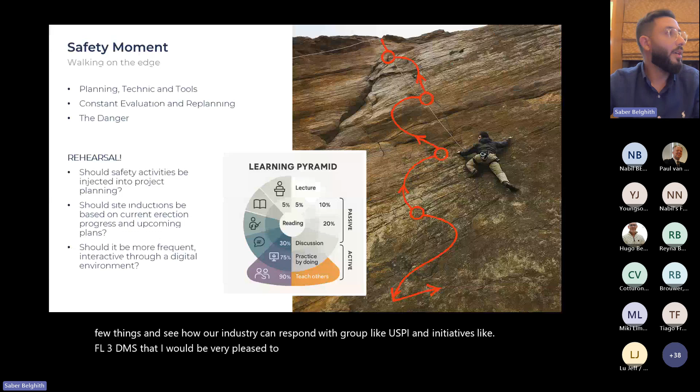So a bit of safety, walking on the edge. This is how I titled this slide. It's not just a safety metaphor, it's a project reality. You've got planning, you've got known processes, common legacy tools, it's all made up of the best team for the project, and yet you're always one misstep away from delay, injury, and worse.

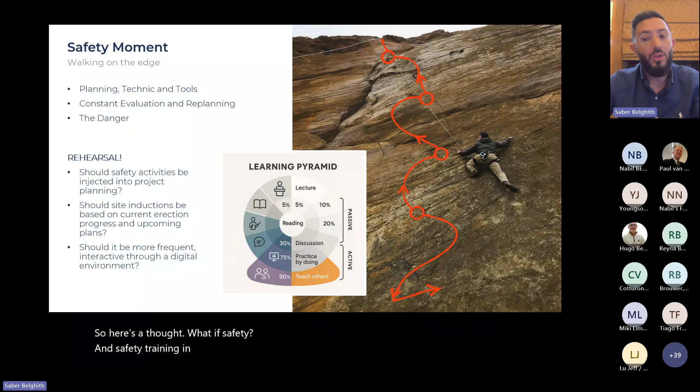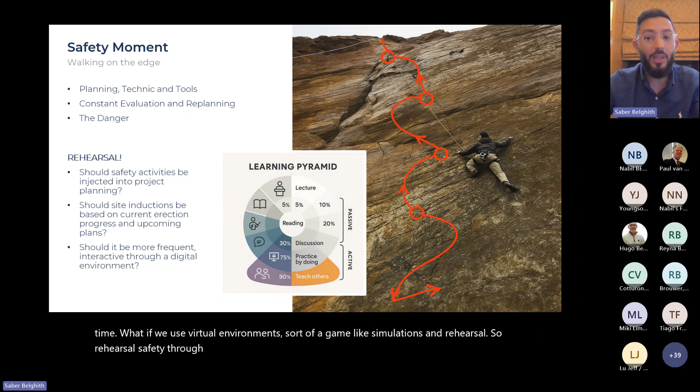So here's a thought: what if safety and safety training and occurrence could be adapted to construction progress, very real time? What if we use virtual environments, sort of game-like simulations, and rehearsal - rehearsal safety through the actual construction real-time progress? So it's not just to train, but it's to plan, right?

And I put this learning pyramid - well, I actually made it as a circle chart - and practicing by doing is seen as 75% retention, active retention of training of anything. So training of safety could be one of the actors for this.

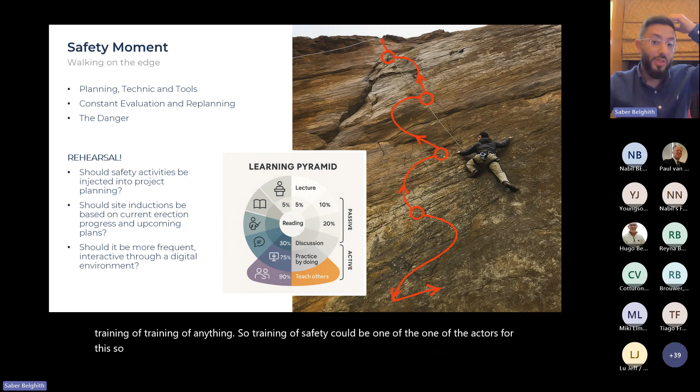Because really the truth is that safety is not just check boxes like BBS programs, behavior-based safety programs, or just safety records and forms that we have to fill in on site. It's more than that - it's how could we have a system of anticipation?

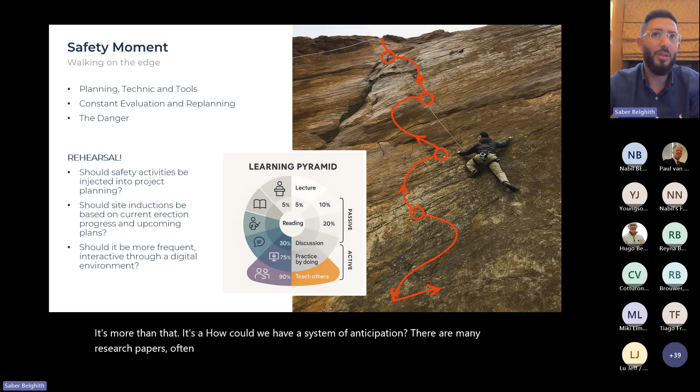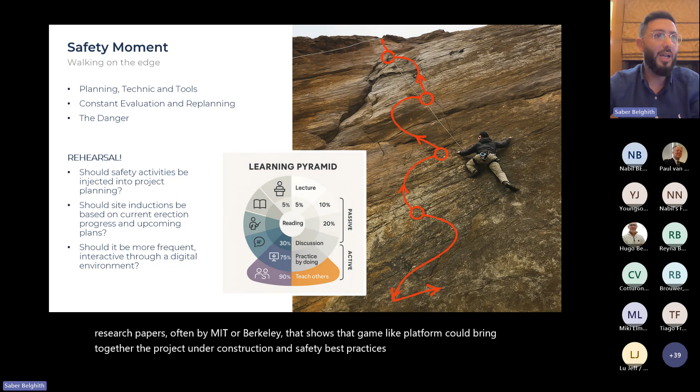There are many research papers, often by MIT or Berkeley, that show that a game-like platform could bring together the project under construction and safety best practices, with lessons learned and all the feedback and scenarios, and it could be built into the gameplay, and all the engineers, the foremen, the scaffolding engineers, whoever, can join in and practice by doing.

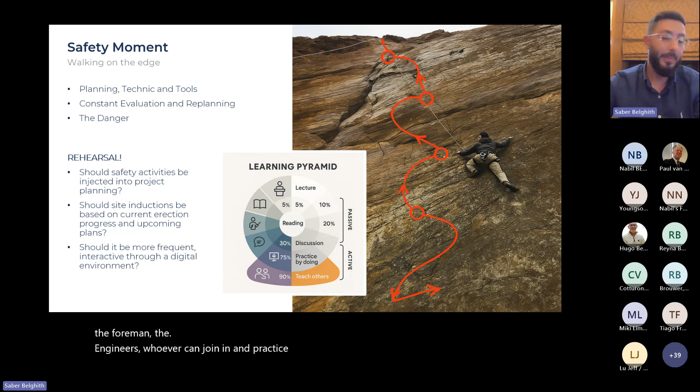We've got to look at the big picture. I think it's always nice to take a macro view and then deep dive, see where I'm coming from and where I want to go.

There is a very big global energy demand. I don't have the exact values, but they are increasingly important. The growth rate over years is increasing itself. It's not a linear growth, it's an exponential growth, and we're really witnessing unprecedented demand for energy.

Infrastructure is expanding. We've seen mega projects in Saudi Arabia, global transportation systems, data centers, AI data centers needing even bigger demand, and regular cloud and digital services. So this all needs energy, and since energy production isn't free, it has consequences.

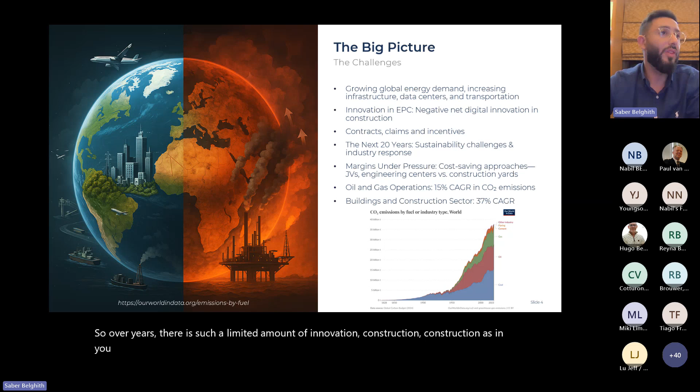Over the years, there's such a limited amount of innovation in construction — in yard, fabrication, erection work. We fall behind year after year. Other industries have leaped forward with automation, AI, integrated data.

Construction remains completely fragmented. Tool adoption doesn't always lead to improved outcomes — we're adding tools, but not always value. This lack of digital maturity has ripple effects: it implies contracts and claims battles, it slows decision-making, it weakens alignments. With every partner working from different tools and different truths, even small delays or misalignments become costly disruptors.

Looking ahead over the next 20 years, I've seen from one of the studies that we expect 60 to 90 new FPSOs to be built. With 90 FPSOs to be built, we are going to respond to the demand for energy. But with the net innovation of our current industry, we are not going to make it better — it's just going to get worse, and projects are getting bigger.

If you've seen Yellowtail, the One Guyana project is a mastodon of an FPSO, about 300 meters — so these are mega projects.

I've seen companies — we all operate as companies, let's be real. Companies have P&Ls, have shareholders, have investors, and we have financial pressures. The margins are thinner and thinner, and everyone is looking at cost-saving approaches.

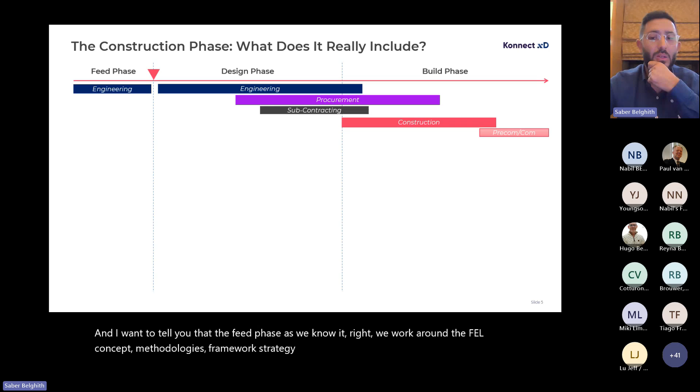I want to tell you that the FEED phase, as we know it, we work around the FEL concept — methodologies, strategy framework, front-end loading — and our FEED and design phases build the constraints, build the quantities, build the strategies. Yet we do not see a lot of construction initiatives within these efforts.

In my past, I worked for Technip. I was part of an amazing group called the Construction Method Center — a corporate group reinventing and pulling the lessons learned from hundreds of projects, years of feedback. We developed so much more construction engineering and helped out with project execution plans. It was an amazing time that really built onto what I know today, what I've done, and how I've built KonnectXD.

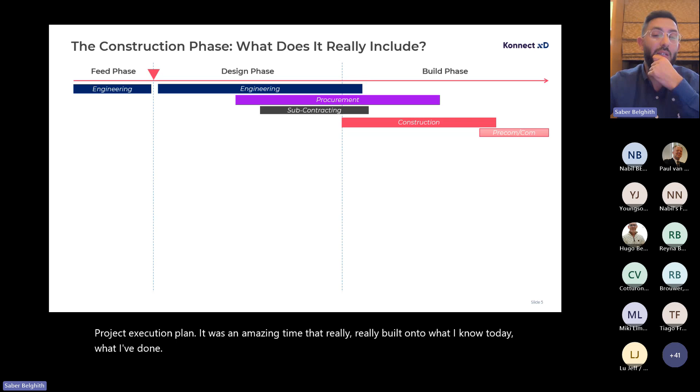So with construction department being more involved in FEED phases, early on in design phases through preliminary construction studies, could be heavy lifting, could be scaffolding studies, constructability programs, reviewing construction schedule. We speak about construction schedule in a bit, and helping make sure construction man hours are adequate, to not say accurate, adequate.

It is a real problem because we estimate the project based on outdated indices. The index, the Excel files, the historical data is either outdated or poorly managed in Excel. And we build this preliminary plan that actually becomes the plan. These become schedules and cost estimate, and we assume that it's going to be a clean handover between FEED and EPC detail or EPC execution.

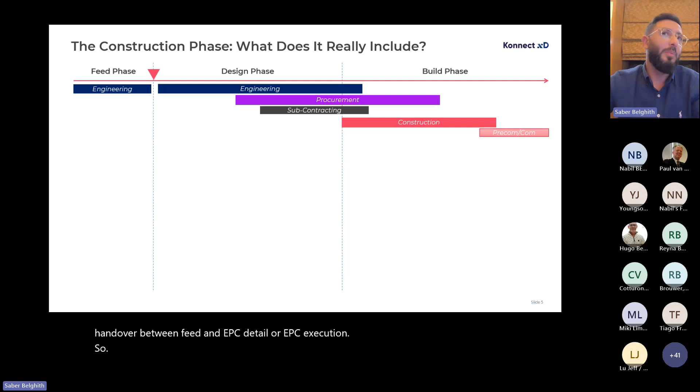A bit about softwares, not mine, others, the engineering one. I know we may have some Aviva guys in here. Aviva is great, I have no problem with Aviva, actually.

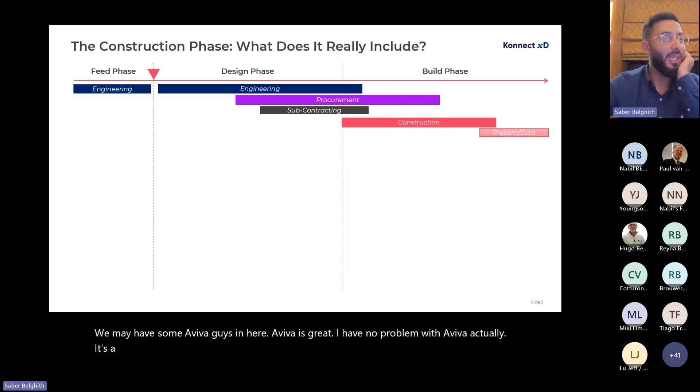It's a constraint. Coming back to P&L and companies, you're looking at being lean. You have a bunch of smart people in these companies, and they try their best to standardize, to lean produce whatever they have to do. Although it's in silo, in core softwares, it's a common group effort, a people effort to put together a project.

But here's the catch: owners and operators. So back to you guys. You have requirements, and it's all understandable too. You do have a decision to make for all your assets. You've got to be an Aviva-owned kind of system for your digital continuity, for your standardization of operation, and you've got to be either choosing Aviva or Hexagon Smart Plant suite of product. So you've got to make a choice. I don't think I've come across client owners that are using both.

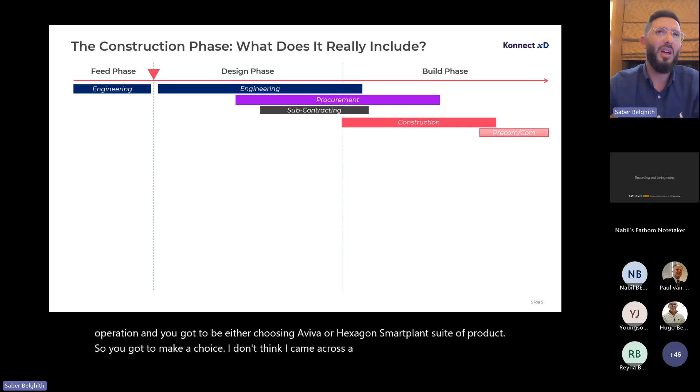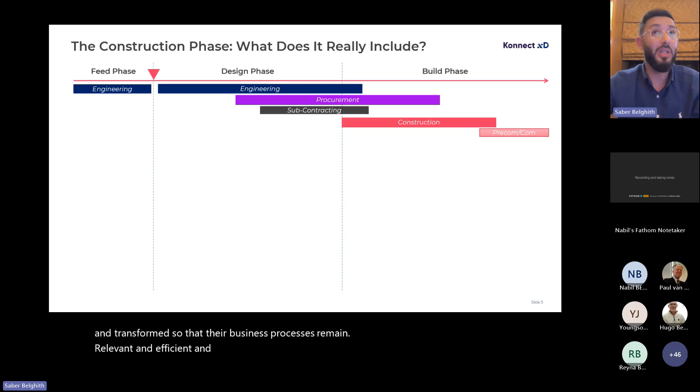It could be legacy one, and then they have taken the decision to only use one. But down the line, EPCs must use both and administrate both and build all their processes either upon each, or converted and transformed so that their business processes remain relevant and efficient, flexible enough to improve it, because it's never good on the first batch, isn't it?

Needless to say, it's not clear, and there's a lot of noise at the beginning of the project at the red triangle. So I have a tentative slide of how it's really being done.

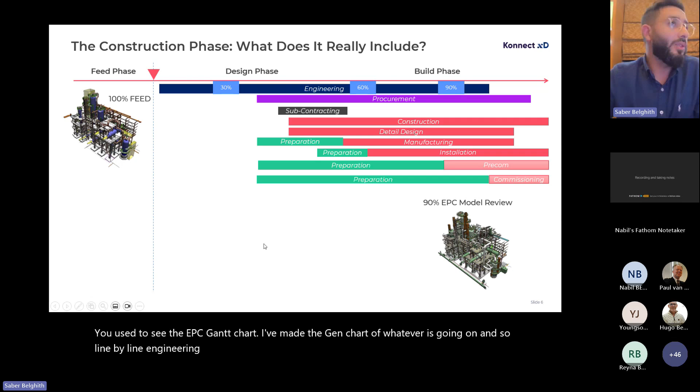You used to see the EPC Gantt chart. I've made the Gantt chart of whatever is going on. And so line by line, engineering has increased by a lot, and it's not a joke.

I wish I had done this by man hours. Looking at the bars like this doesn't show the amount of man hours spent in construction is a lot more, just that the thin bar is a lot. So I had to split it into what it is actually.

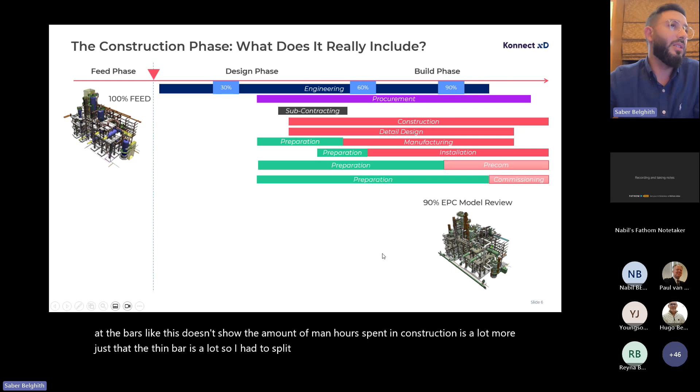So the issue is engineering goes on for a long time. Procurement starts pretty much when long lead items very early, and then it happens for a long time until we actually get 90% right. And I can tell you, we have quantities of engineering revision after it's IFC, and it's not looking too good after 90% either. So we have a sort of a broken model, and that's probably my next slides.

But I really want you guys to focus on this part. Construction is just not construction. Construction is in charge of detail design.

Construction actually takes the 3D model of engineering and makes it into a fabricatable, an erectable, a construction grade 3D model with actual steel structure, actual welds and spools, and things get fabricatable. Although they wish they could have more information earlier, they're unable to plan production of their fabrication.

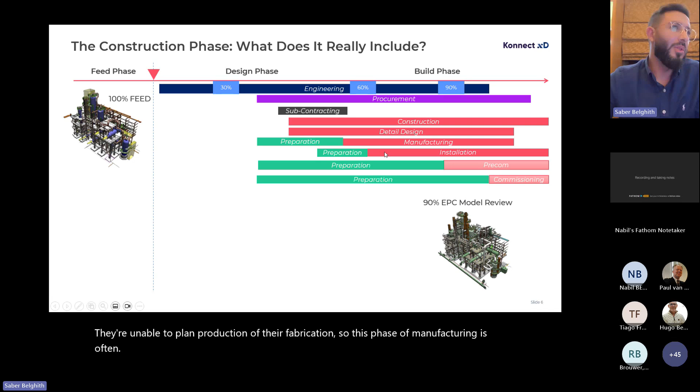So this phase of manufacturing is often underestimated, I would say. It's an important link between procurement, detail, and installation. It is a very important workstation, and I'll speak about workstation a bit later.

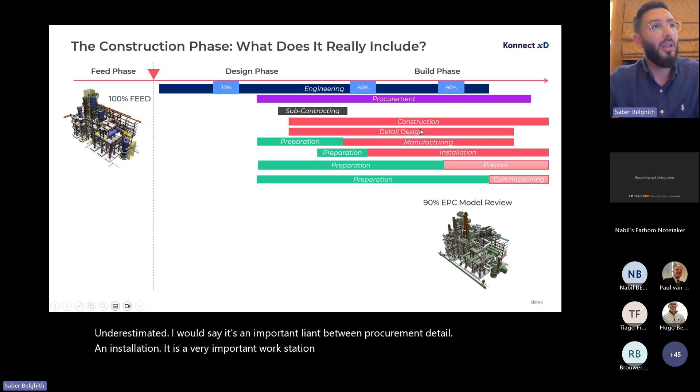I have to be mindful of the time. I'll spend the whole day talking to you guys. So 20 minutes, I have about 25 more minutes to go. I think I'm going to accelerate a bit.

So what I've seen is that construction is a great mindset. Construction would do things that is not necessarily on paper, but they want to get ready. They want to make sure they have planned enough resources. They have understood the scope of work so that they can use a maximum of their fab shop and painting shop and scaffolding.

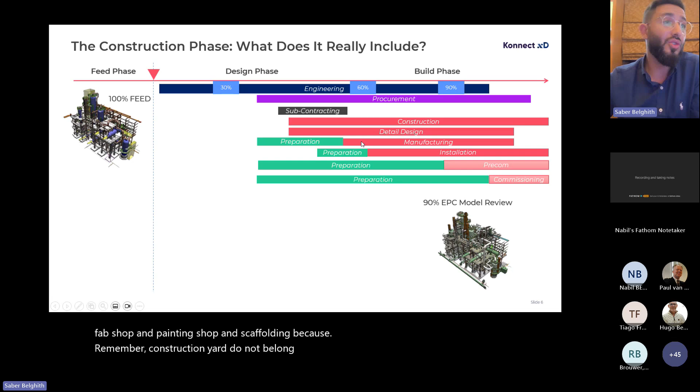Because remember, construction yard do not belong to EPCs. Construction yard do not belong to owners and operators.

Construction yards can do 2, 3, 4 clients at a time. Therefore, they have a workstation and a manufacturing issue of delivering to certain projects. So we'll speak more about them later. And manufacturing will deliver to installation.

And I love to split construction into pre-commissioning and commissioning, and really pointing out that these guys do not just show up here. I mean, these bars are counterintuitive. They don't start working here. They actually want to work a lot earlier. They need P&IDs. They need to prepare loop checks. They need to prepare understanding of their systems. They need to do a lot of work.

where we develop 3D models, by the way. It is more common, I hope. And I don't think it's going to go slower. It's just going to be more and more automated and better information, therefore better estimates, maybe better schedules, better understanding of the scope of work. And this is a 90% EPC model review. That's why I put it right here. And I have the next slide to explain a bit about it.

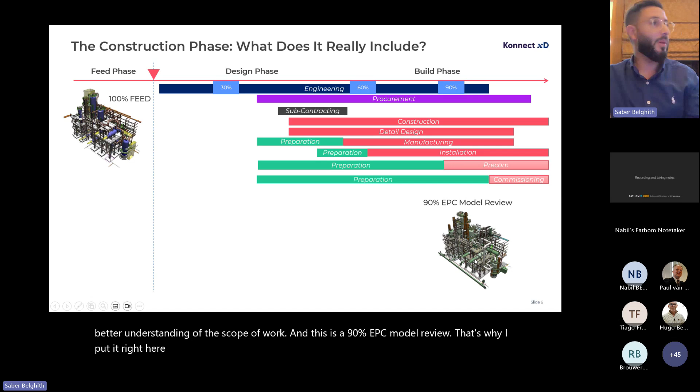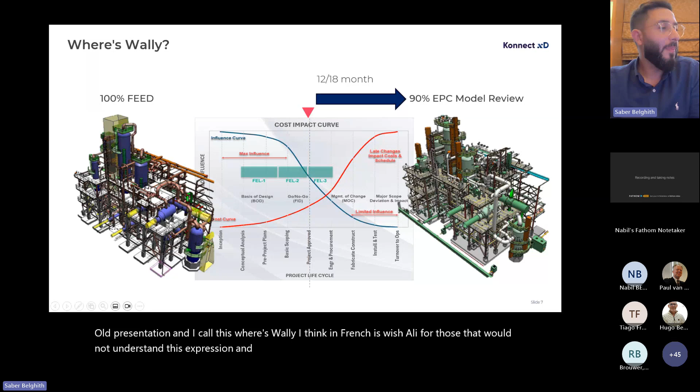So I put together a 100% FEED and a 90% model review. These pictures are 10 years old. I took them from an old presentation. And I call this Where's Wally? I think in French it's Où est Charlie? For those that would not understand this expression. And I had the data back in the day, but I mean, look at it. This is 100% FEED. This is 90% EPC model review, although this was 18 months later.

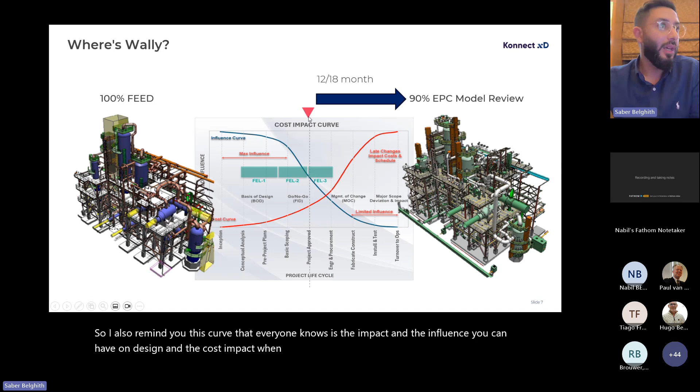And if I come back to this, I remind you that construction wants to know as much as they can, although they can't get any information, or not much, unless there's a certain maturity of the engineering. So I also remind you of this curve that everyone knows: the impact and the influence you can have on design and the cost impact when changing stuff. And so I put that red triangle and that line to show that this is the award of the EPC project. Therefore, FEL3 starts here, and then anything you do has a really wide impact.

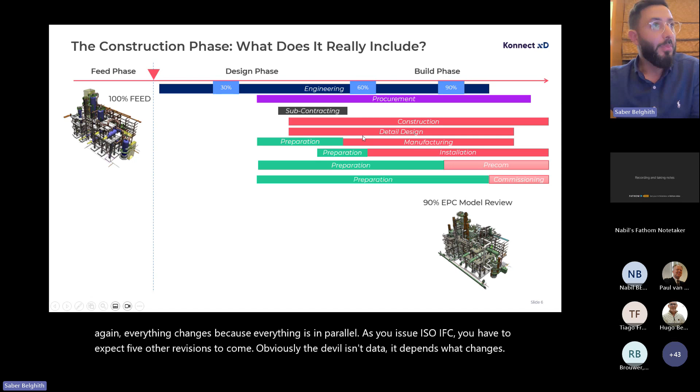And again, everything changes because everything is in parallel. As you issue ISO, IFC, you have to expect 5 other revisions to come. Obviously, the devil is in the detail. It depends what changes. But because it's an analog process, we've got to look at it from a different angle.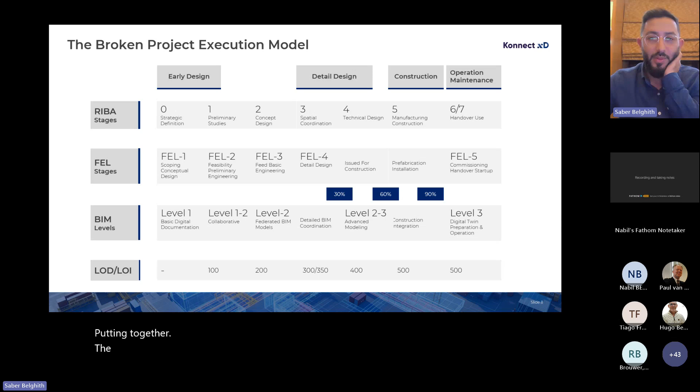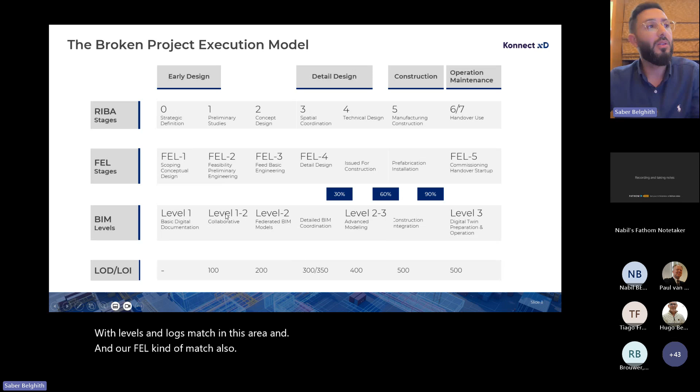So I also put down this slide that is about putting together the FEL stages that we know with the BIM stages that we probably not all know in here. It's building information modeling, a lot of you may know, the BIM with their modeling levels. So they have different ways of talking about it. They have RIBA stages, but they all kind of match. And BIM levels and LODs match in this area. And our FEL kind of matches also, with a little bit of overlap and differences in some places.

But I want to highlight this area. The area of concern right now, the EPC phase, where we have a 30%, 60%, 90% model review. And when things are issued for construction about here, for us, they already have an advanced modeling that is probably a 90% LOD 400. This is fabricatable. This is installable level of development.

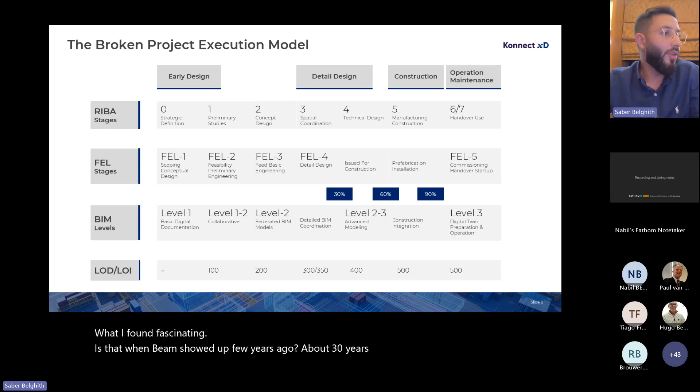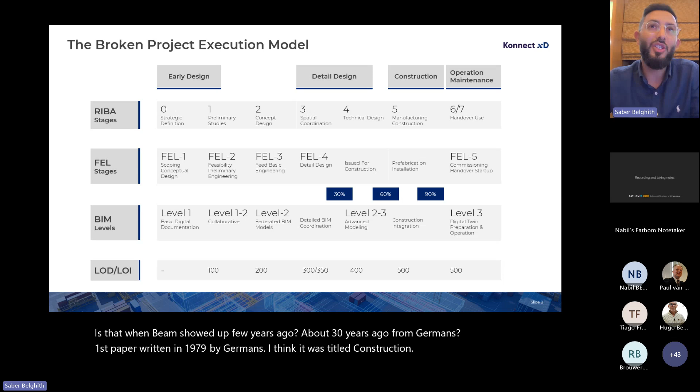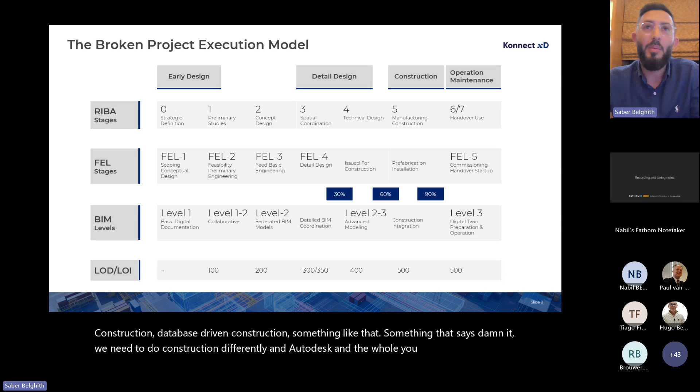What I found fascinating is that BIM showed up about 30 years ago, from Germans, a first paper written in 1979. I think it was titled Database-Driven Construction, something like that. Something that says, damn it, we need to do construction differently. And Autodesk and the mega companies were able to leverage this research paper and develop software and processes with industry standards. There are other groups like buildingSMART, and other groups that are a bit more advanced than us. It's a bit different, but what's quite interesting is that

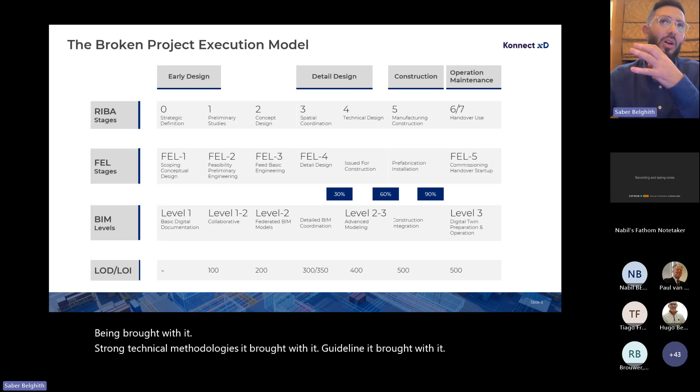BIM brought with it strong technical methodologies. It brought with it guidelines. It brought with it the need for product catalog libraries in the 3D software, and a whole framework, obviously, of working between disciplines. And you see VDC, virtual design and construction groups, in the middle. That is an augmentation of planning.

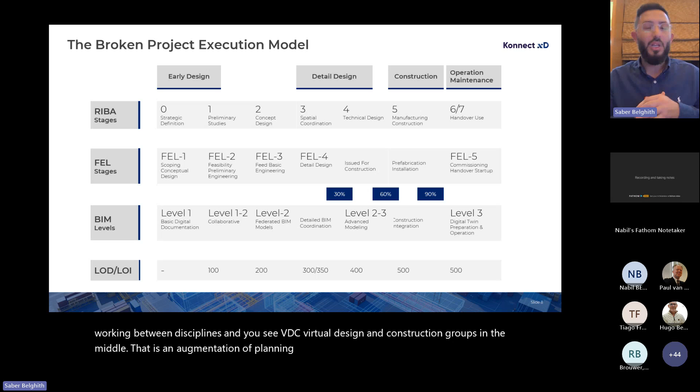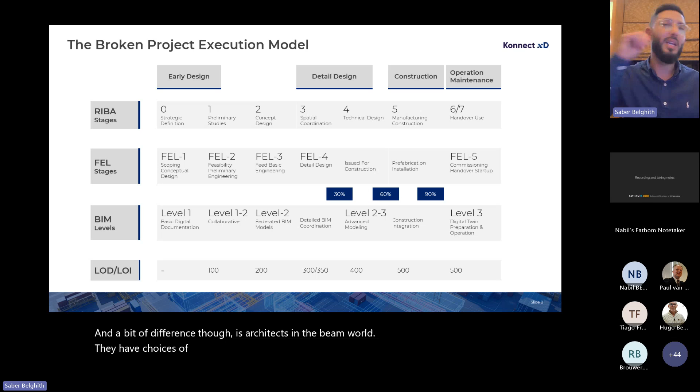And similarly, we have AWP groups from frameworks, and a bit of difference though is architects in the BIM world. They have choices of creativity. They can design things that are out of the box. In our industry, we rely on process engineering, strong methodologies, material classes, piping class, libraries, product libraries, and so on and so forth, catalogs that really help fundamentally the capabilities for shareable data and unified data.

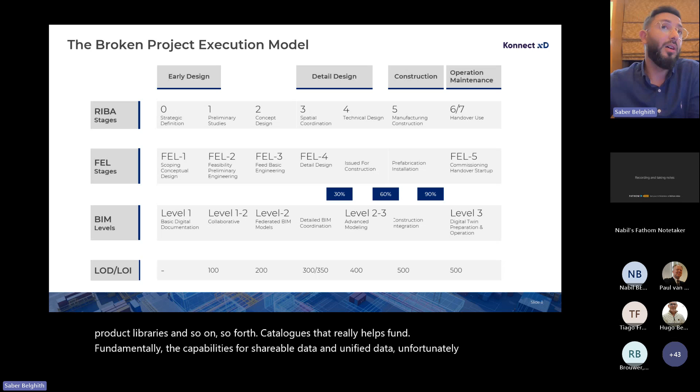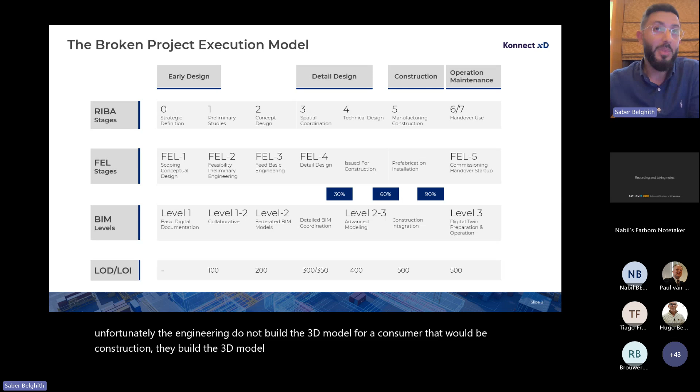Unfortunately, engineering does not build the 3D model for a consumer that would be construction. They build the 3D model for themselves. And most recently, thanks to CFIHOS and some other initiatives required by owners and operators, making it an asset that they can actually use for operation and maintenance.

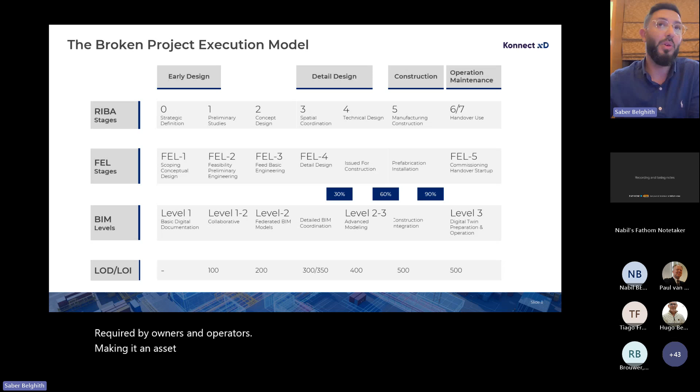And here's another problem that we encounter in 2025. I came across a real owner-operator request in a tender, and they're asking for an enterprise information management tool. This is a big box. I love how it doesn't have a name, really. It doesn't have an image compared to everything else. It is something that no one knows what it looks like, what it is. It looks like something that serves as a single source of truth.

It looks like it serves as control over the data, the things that are going to change, automation with this icon, the automatic icon. It looks like it's a guarantee for quality or better quality, and the availability of this data, being able to have a repository where data can be consulted. But it really is to show that although there's a lot of problems with this from a software architecture point of view, it is a good effort.

It is clearly not something nice to have anymore. This is expected, so owners are really pushing for it. EPCs are adapting. EPCs are using a new set of tools. They are amazing tools, like Aveva Engineering and some other tools that could respond to some of these aspects. Yeah, it is the real truth.

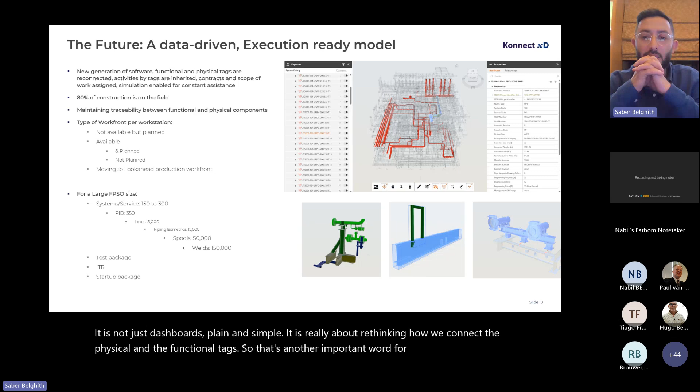It is really about rethinking how we connect the physical and the functional tags. So that's another important word for us. Tags, where we could assign work to tags. We could track the changes on tags. We could move towards real production readiness. So if you think of an FPSO, a bit of sizing of what we're talking about. With KonnectXD, we've done about 7 or 8 FPSOs, not small ones, big boys.

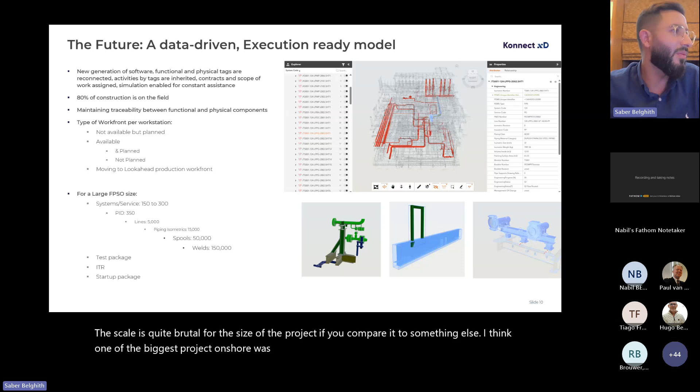And those have 150 systems, up to 300 sometimes, 5,000 lines, kilometers of lines, obviously, 15,000 isometrics, 50,000 spools, 150,000 welds. It's kind of big numbers, but still something that is manageable. It's not called big data. The scale is quite brutal for the size of the project if you compare it to something else. I think one of the biggest projects onshore was about 20,000 something isometrics back in the day.

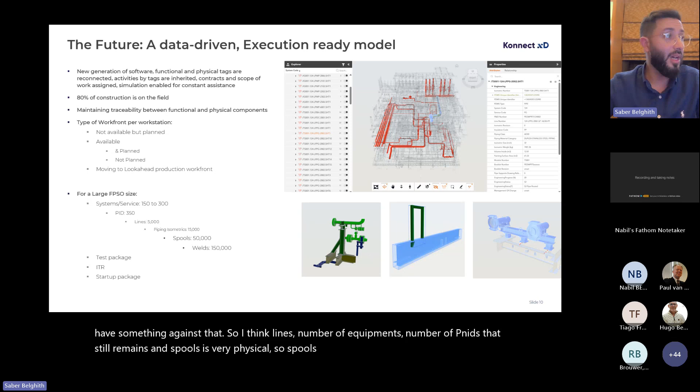But that information is actually unreliable, in fact, because the piping isometric is a byproduct for exporting drawings, and I have something against that. So I think lines, number of equipment, number of P&IDs, that still remains, and spools are very physical. So spools are the little pieces that we have to put together. They go from 2 kilos to 2,000 kilos.

And it's very important to see that it is very easy to kind of lose control, and lose control fast, especially when you are a slave to engineering and procurement groups. Not in a negative manner, in fact, but you're waiting. And as you're waiting, you are unable to scope out, hire people, keep people.

And so, okay. So now let's imagine if every activity could be tracked by tag, if change could be captured in real time. So changes from the engineering, changes happening on the construction site. And if we could clearly identify work fronts. So I like to categorize work fronts into 3 main categories. Work front that's not available, but is planned. Work front that is available and planned. That's like a winner. And available work front, but that's not planned. And we've got to think about what we are going to do with it.

Is it going to stay in laydown and perish, or is it going to be squeezed into assembly line and fabrication line and installation? So it's all about moving to a look-ahead production work front, and this is about understanding the time and duration that every single tag across every single activity will last, so that we can plan out weeks and months in advance.

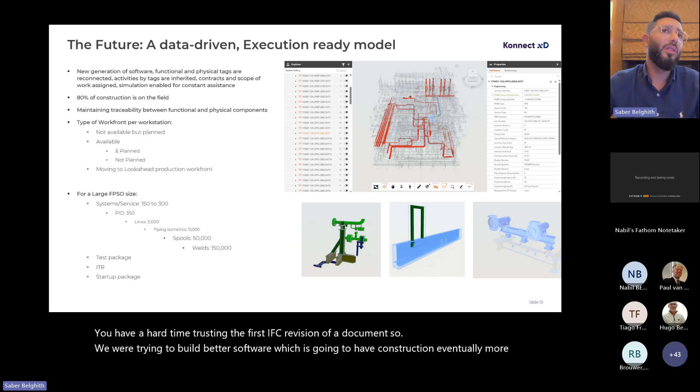So we're trying to build better software, which is going to help construction, eventually more people, but through a workstation mindset. So I've got to jump to technology, but actually I want to show you a bit of what's written right there on the right, on the diagrams, on the pictures. Let's start at the top.

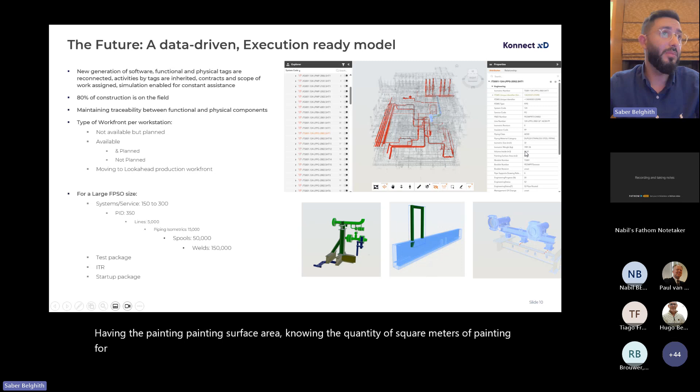Reconnecting what the systems are, what the ISOs are, what the spools are, and having curated data is not a nice-to-have anymore. Having the painting surface area, knowing the quantity of square meters of painting for isometrics, or the volume in cubic meters for later testing and cleaning, the total weight and all this data curated. The name of the game is also quality.

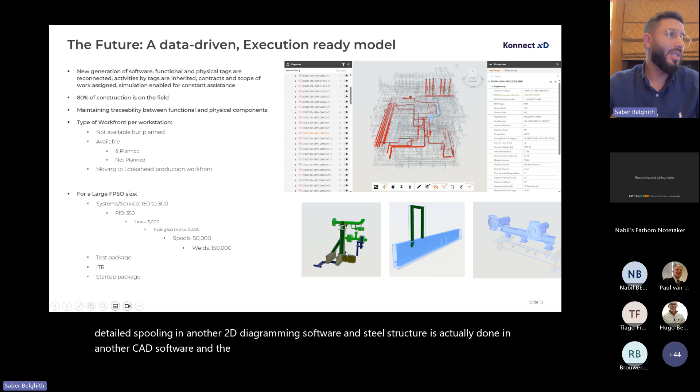This picture is a representation of the physical world and the functional world not being able to connect with our current tools. Our tools give us piping within CAD software and detailed spooling in another 2D diagramming software, and steel structure is actually done in another CAD software, and the reconciliation of steel structure supporting piping is not done at all in our original source CAD software because it's too heavy, it's too complicated.

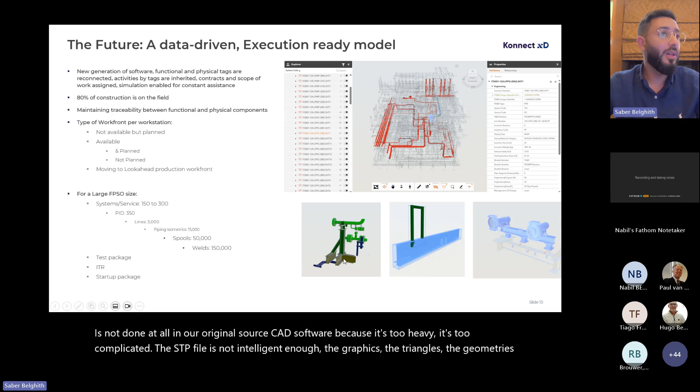The STP file is not intelligent enough. The graphics, the triangles, the geometries, the B-reps of the steel structure are not getting imported properly into CAD software without giving names. And so this is where KonnectXD comes into the picture. In this picture, KonnectXD has connected this pipe with this ancillary pipe support, with this steel structure pipe support, with this steel structure beam.

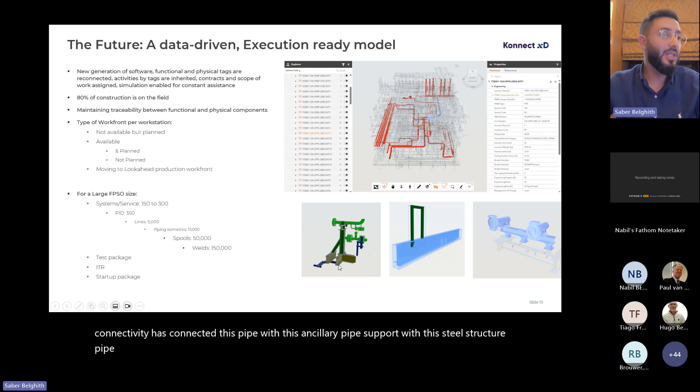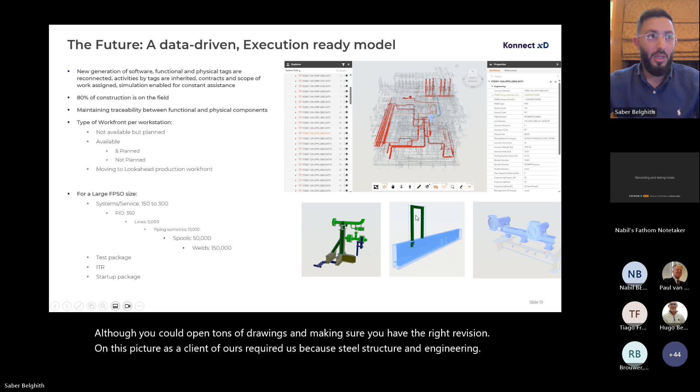And today, if you were looking at how we process data without KonnectXD, you would not have this information at all, although you could open tons of drawings and make sure you have the right revision. In this picture, a client of ours required us, because steel structure and the engineering CAD model are disconnected without KonnectXD, to find discrepancies. Some people would think of clash management for this, clash checking, clash detective, whatever the name.

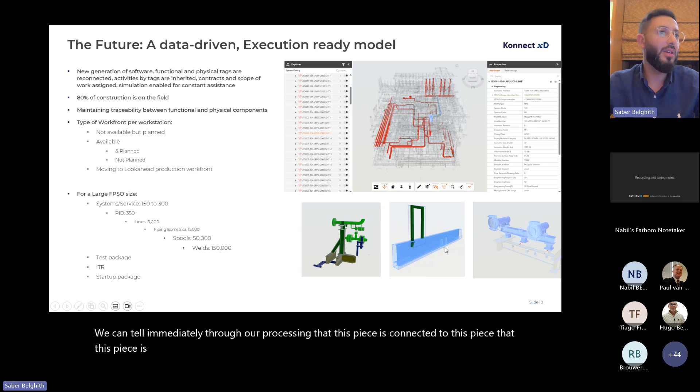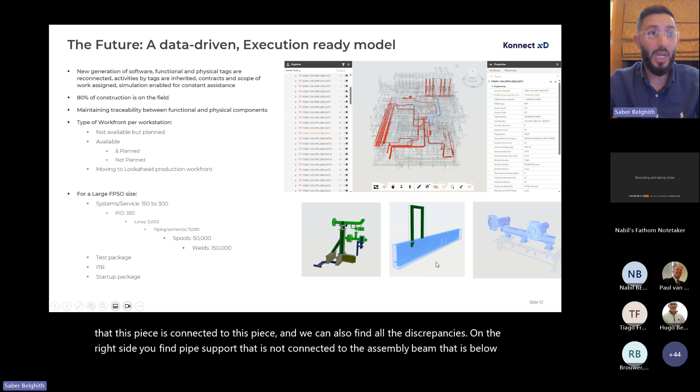We've invented physical relationship checking. We can tell immediately through our processing that this piece is connected to this piece, and that this piece is connected to this piece. And we can also find all the discrepancies: on the right side you find a pipe support that is not connected to the assembly beam below it. So instead of doing clash checking, we're looking at void checking.

So I've got to jump a bit into tech. So what's the foundation of that model? It's trust. And that trust is built on data you can believe in. You ingest it properly, you build robust pipelines, you clean it, you analyze it, and only then can you start to simulate and forecast accurately. You can actually do a lot of things, not just forecasting.

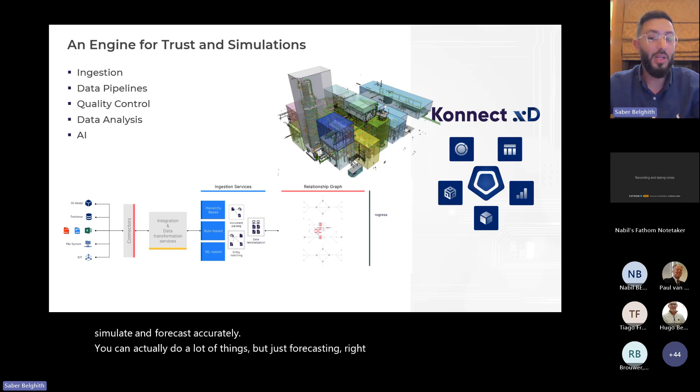Right now, we simulate based on assumptions. But what if we simulate based on actual project conditions, by tag, by test pack or by system readiness? That's how we move from firefighting to foresight. This is how KonnectXD is built. So in essence, this is building relationship graphs, tons of them, business-minded, and then being able to go through progress, quality, and completion.

For trust, let's stay focused on trust for a second. We all know what it's like to chase down the latest revision or realize too late that a spool drawing was outdated, although we fabricated the spool.

Without quality control and structured ingestion, your beautiful software stack is just a house of cards. So we start with data pipelines. We design for engineering data, construction tracking, material progress, and then we enforce quality gates. Are the tags consistent? Are the relationships intact? Is the hierarchy valid? The 3D model hierarchy, is it valid? Is it comprehensive? Is it accurate? Is it complete? Is the metadata of P&ID number matching a tagging convention?

There are so many questions. Our projects are complicated, but yet we do not have the right set of tools to handle them from a data quality standpoint. So we've built dashboards, pipelines where you can actually build and specify the workflow, clean recipes, split information, join databases, and run some automated processes. And just for the sake of it, there is no AI here yet.

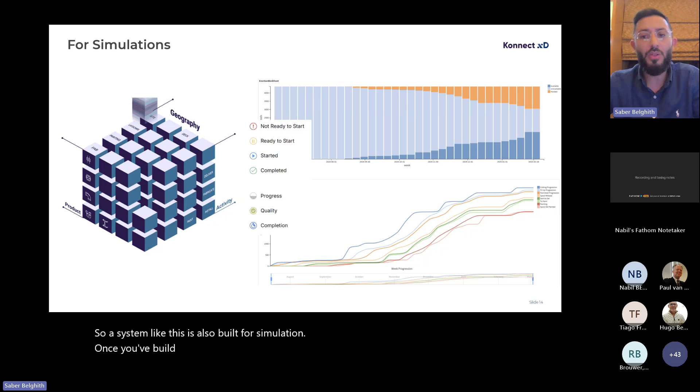So a system like this is also built for simulation. Once you've built that trust, quality control, data analysis, you're able to unlock simulation capabilities. This is not science fiction. You can simulate system completion readiness. You can simulate spool delivery timelines. You can even check the test package maturity.

Imagine being able to say this test can't happen because two upstream welds are still pending, and they are delayed because the manpower is on another system. That's where simulation becomes a command center control tool. It's not about pretty charts, it's about operational decisions made in real time with confidence.

We are very familiar with S-curves. We are less familiar with being able to view in the future what could be available and what will not be available. So I want to speak a bit about competitive advantage through a chart. So the S-curve, the typical S-curve. So it's really about moving from theory to strategy.

So let's just face it, if it were just about being neat and tidy, we wouldn't be having this conversation. This is a competitive play. Yards compete for the same projects, EPCs compete for the same projects, and at the end of the day, we are looking at profit margin, optimization work, and we go from one project to another project with no step back to be able to effectively change something that wasn't effective, if you see what I mean.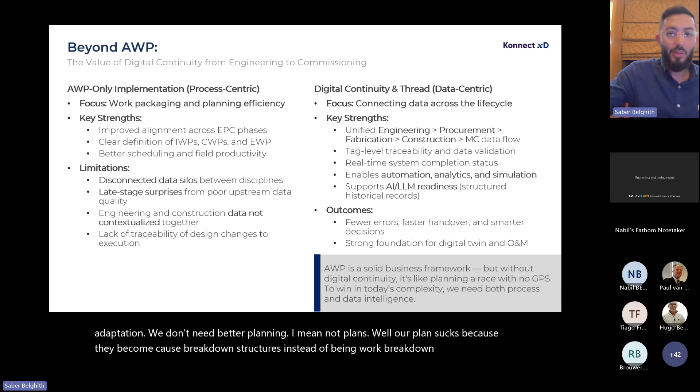So you don't just plan better, you adapt better. That's what construction needs. We need adaptation. We don't need better planning. I mean, our plans suck because they become cost breakdown structures instead of work breakdown structures. But that's probably for another topic. We need ways to adapt better. So to be able to recover faster, you need to be able to hand over to the startup phase clean.

People should not be looking through a whole dossier, folders of drawings, and repertoires and hierarchies of deliverables on a USB stick to find what they're looking for. So to me, digital continuity and thread, data-centric, really. Well, we've been speaking about that for 10 years, which is just another word. It's just how we move from efficiency to resilience.

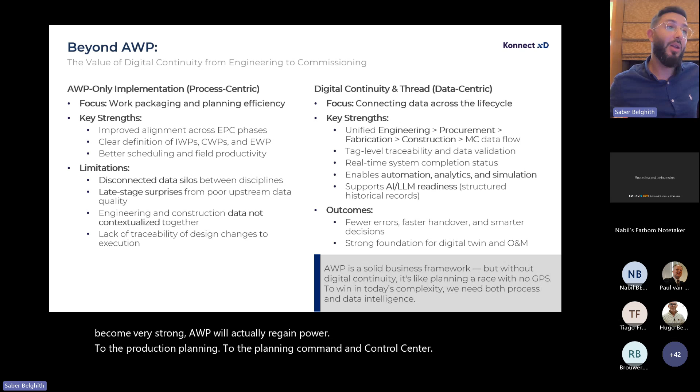AWP with digital continuity will become very strong. AWP will actually give power back to production planning, to the planning command and control center. Planning is now left to building these Primaveras of 30,000 row items with predecessors and successors that are so macroscopic that there is no piloting of the project. It's just become a reporting tool.

Owners and operators are requiring a cost breakdown structure because we have a hard time transforming a project breakdown structure into a cost breakdown structure. We just do not have the right tools.

My next slide is how do we all build together? And what do we build forward? I want to speak about the digital asset that's actually usable for startup, commissioning, mechanical completion, the critical startup phase, and operation.

So it's not another stack of PDFs. It's not a hard drive of CAD files. It's not enough to have unstructured information and analog data to reach the goal of a digital twin. A structured, intelligent, and contextual digital twin would link the physical asset to the functional asset.

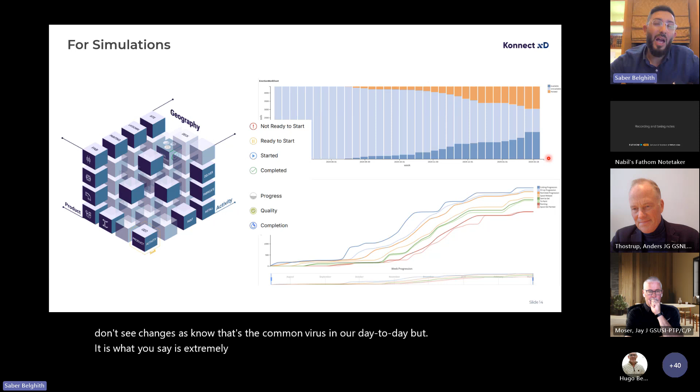Finding the right way to implement something so wide, and the spectrum of it is so wide, it takes years. It just takes years to implement. There's no choice. The people that are actually supposed to get trained and supposed to implement the new processes on projects, they're not outside projects. That's the P&L. They are doing projects, and that's their job. And once they're finished, they can't just be a resource on the bench, they go to a next project.

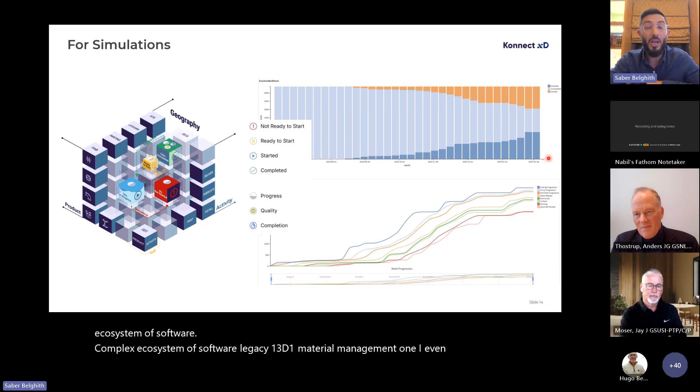So I found it so hard, Anders. And as I put my hat of a software vendor and a founder, I have found ways of commercially integrating, implementing my software within a large ecosystem of software, complex ecosystem of software, legacy one, 3D one, material management one. I even have clients that are installing ERP systems for material management or progress tracking. They're moving from Excel to, and they are not small. They are very big.

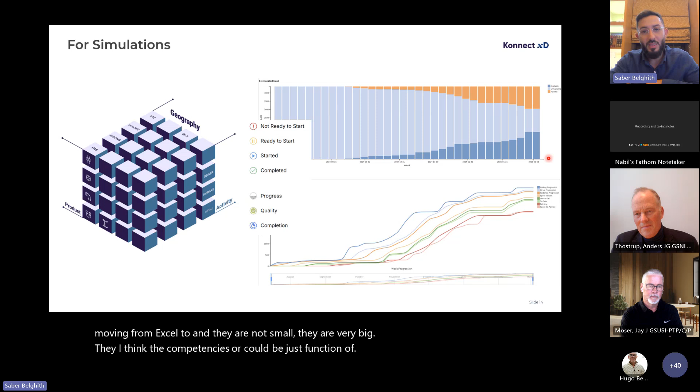So I think the competencies could be just a function of people availability. People want to change at a small pace, but they're unavailable and they move, and they go from a career to another career. And as soon as you have an AWP certification, you kind of promote it. And I want to raise another issue that I found and that disturbs me.

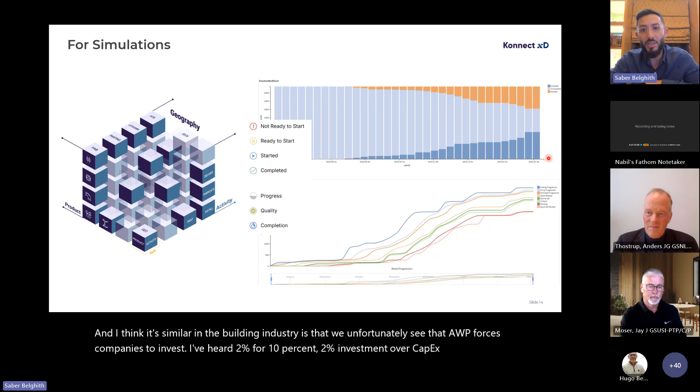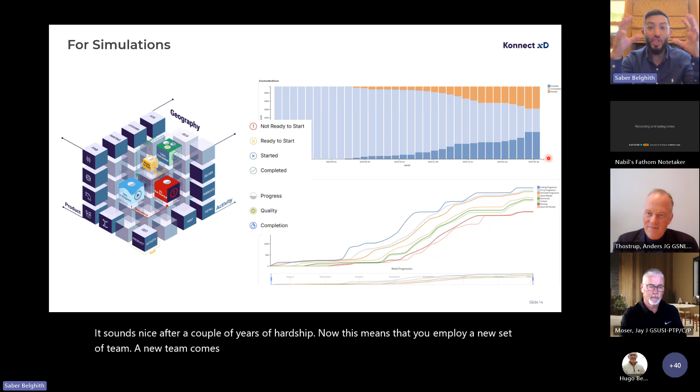And I think it's similar in the building industry, is that we unfortunately see that AWP forces companies to invest. I've heard 2% to 10%, 2% investment over CapEx project for 10% improvement in productivity. It sounds nice after a couple of years of hardship. Now, this means that you employ a new team, a new team comes in and disrupts how things are going on. I am sad to see that there are AWP teams.

So we just move the problem. We move the problem from, in my past, planning was like that center of command. I love the Italians for that. Italians were so strong in planning, and they really control their projects. They are the people that understand the scope that changes, what the client wants, what construction is messing up with, and they make sense of stuff.

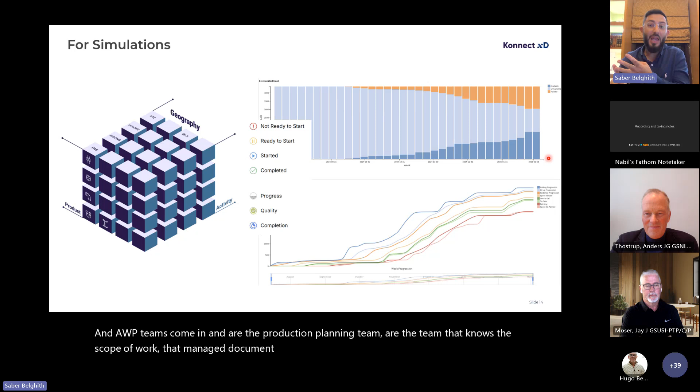Now planning is doing Primavera P6, and AWP teams come in and are the production planning team, the team that knows the scope of work, manages document revisions, and helps everyone understand what the problems are. And that is a problem to me. We've put more people into a problem that we haven't solved.

I'm going to ask Jay Moser. I think Jay, you will introduce yourself, but I think you are a board member of the CII, correct? Correct, yes, I'm going to sit on the board. Yes, it's correct, the board of advisors. And yeah, Saber, I won't get into too much detail here, but it's just to kind of help expand the conversation. Yeah, we can't hear you, Jay. Jay, you got muted, I'm sorry. Okay, Saber, yeah, I'm not going to get into too many details here.

I just wanted to say, thanks for bringing the information. I think we all, if you've been in the industry very long, recognize the problems. There's a lot of problems you identified that we need to solve. And I don't think there's one solution, whether that's AWP or lean or whatever the process of the day is, that's going to do it. It's going to take a combination of best practices throughout the industry to push us differently.

All I will say is that when you look at oil and gas or energy projects in the history of our productivity, we are second from the bottom, and it's been that way for 40 years. So what are we doing wrong? We're not stupid people, all right? I think everybody can bring together a solution that supports better outcomes for owners and for EPCs. Everybody should win, right? So I think the message you're coming out with here is, look, we've got a couple of things. We've got the history, we've got the problems, we've got the process, we've got digital now on top of that. We've got AI coming at us left and right.

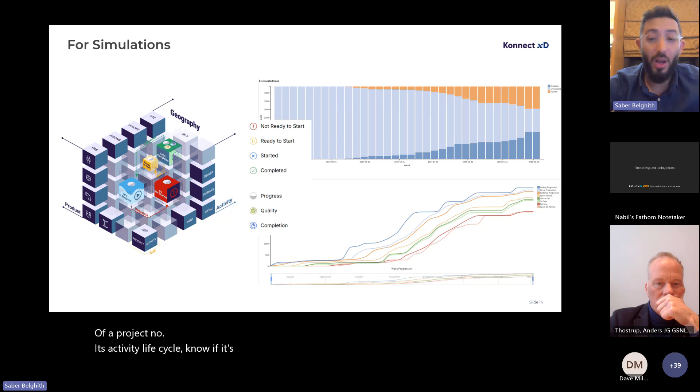What you see on the screen here, I haven't presented the cube on the left, but what this tries to tell everyone is that we have the data and the ability to actually know every single tag of our project, know its activity life cycle, know if it's done, know how long it takes to get done, and what would that open up for the other things physically connected to it.

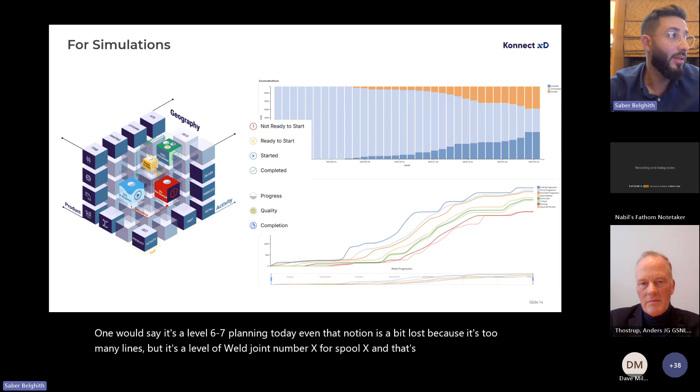And we automate that, that's the algorithm. So one would say it's a level 6, 7 planning today. Even that notion is a bit lost because it's too many lines. But it's a level of weld joint number X for spool X, and that's a BW type of weld, and that's a task, fabricate. So this is what I describe as a task in the small cube at the bottom: product times activity times geography.

I understand where the spool is going to happen, what type of element it was, a spool, and what activities are linked to it. I hope this helps. So you're talking about your solution for the simulate phase? Yeah, this is the one we've built.

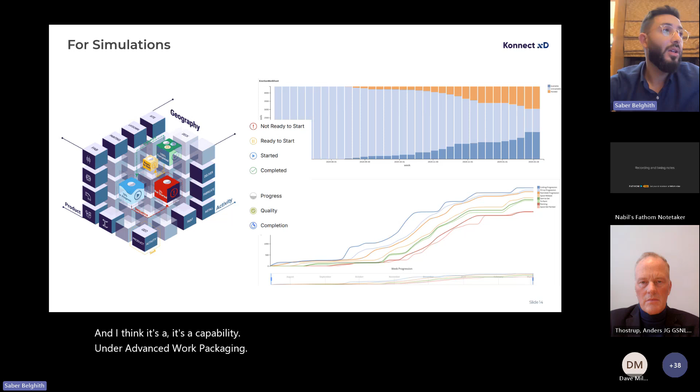In essence, you find everything that's ready to start at the level of weld, pipe, support. And I think it's a capability under advanced work packaging that will enable people to adapt rather than plan. But we have a look ahead, so sure, planning, but short-term planning.

Yes, Laura. Yeah, hi, thanks for the presentation. It's really nice. I found the comment about linking the cost breakdown structure, linking your estimates and your model, very interesting. How do you approach that currently? What's your vision on that?

So there are a lot of things, Laura, that I cannot really say because there are all the software vendors in this conference. I'd be happy to discuss with you anytime. We keep things connected, so it's something I do. We prototyped moving from FEED to EPC, it's something I have an eye for. We've made many advancements, but this is not something that I've commercially productized, if I may say. But we've done a lot of things.

Follow up on that? Sure. Thanks for the question. So there was also another question in the chat.

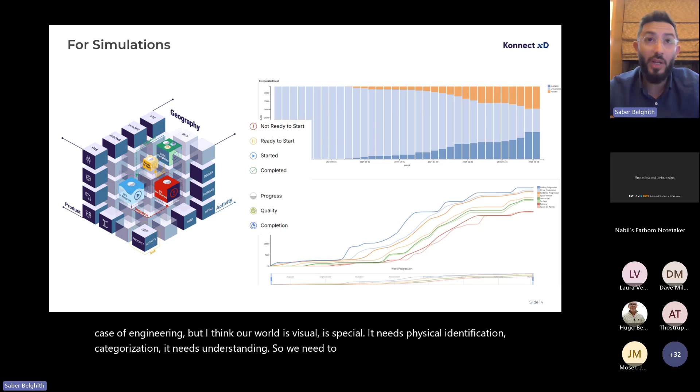And I think construction, here you took a case of engineering, but I think our world is visual, is spatial. It needs physical identification, categorization, it needs understanding. So we need to label the videos, we need videos on site. We don't have videos on site. That's my thoughts, Paul.

All right, good. We are overrunning 2 minutes by now. So pretty well done, I would say. I would say if there is...